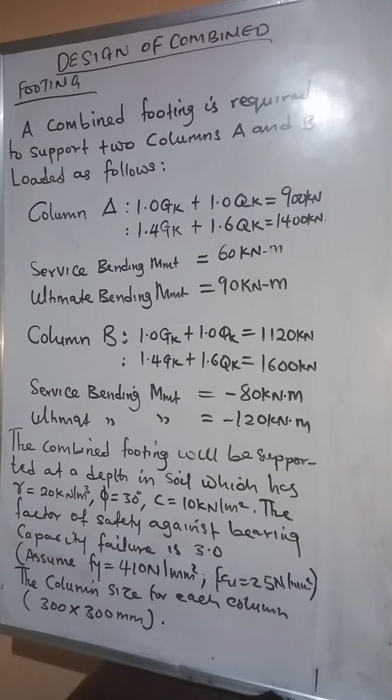All right, today we have a topic before us: design of combined footing. And we have a footing we intend to design that is going to be supporting two columns, A and B.

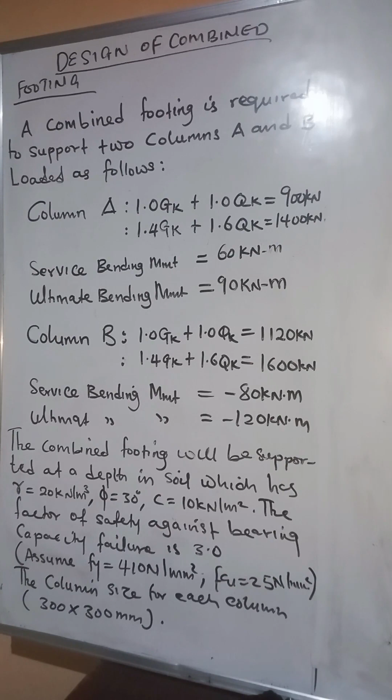We have been given the loads on the columns. The service load on column A is 900 kilonewton, the ultimate load at column A is 1,400 kilonewton. Equally, their service bending moment for A is 60, ultimate moment for A is 90. The load on column B: service load 1,120 kilonewton, ultimate load 1,600, service moment 80 kilonewton meter, ultimate moment 120 kilonewton meter.

The design parameters: characteristic cube strength of steel has been given as 410 Newton per millimeter square, and that of concrete, 25 Newton per millimeter square. Now the columns are of size 300 by 300, so they are made up of square columns.

So we're going to commence the design by first of all sizing of the footing, and we'll look at certain scenarios before going into the design. Now let's go over to the design.

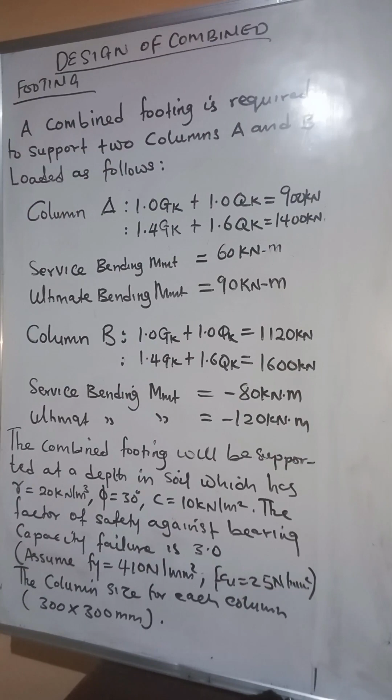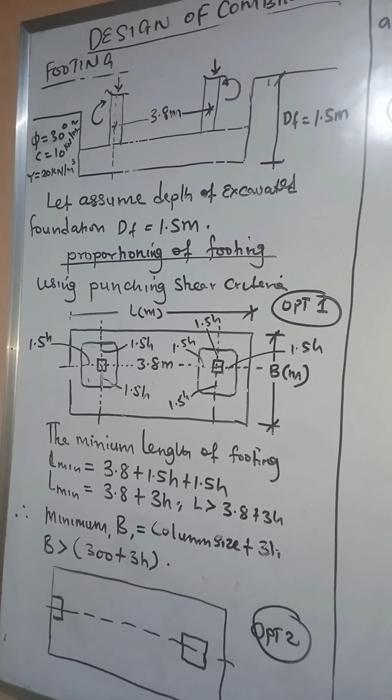All right, so we are going to look at the footing. We've already chosen a depth for the foundation, and we have the depth of the foundation to be 1.5 meter deep. Now let's assume that, and in proportioning the footing, we must...

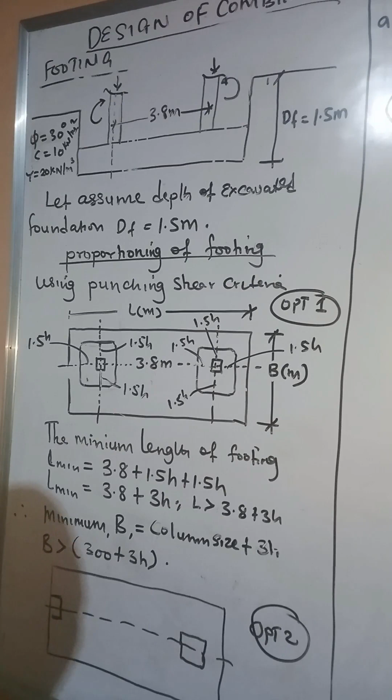Hey, you are making noise. No noise.

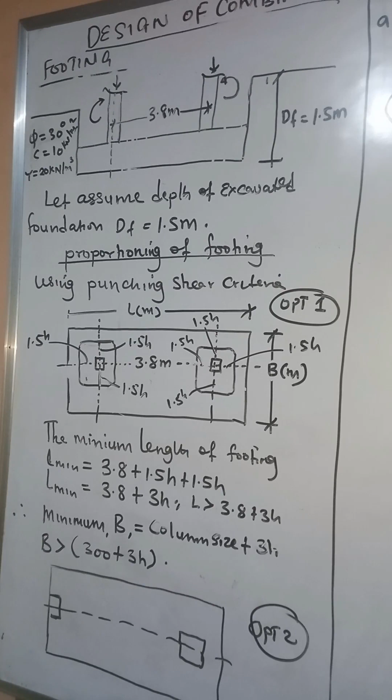All right, so in proportioning the footing, we are going to make use of the punching shear criteria. Now note, from the punching shear criteria, we are having from the face of the column, according to the British standard, 1.5H on each side of the face of the column to the critical perimeter.

So this is a critical perimeter, this area is a critical perimeter. So we have the distance from the face of the column to the critical perimeter as 1.5H on both sides, and we have a similar thing on the other side.

So if we want to design this footing so that we have a little cantilever from the face of the column, let's say 600 this way, 600 this way, 600 this way, so that we have that cantilever from the face of the column, we're going to have it as this.

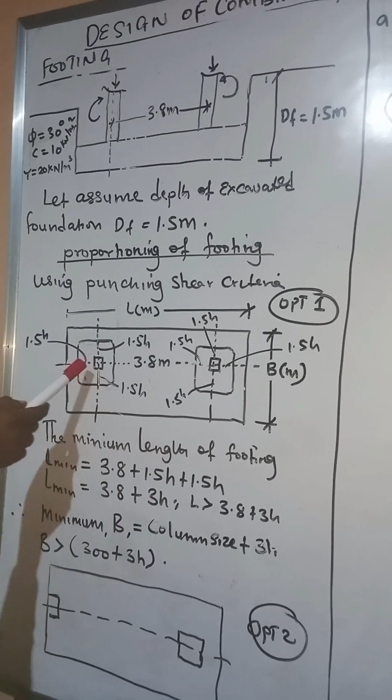Remember that for tension, our tension reinforcement must move beyond this critical perimeter. So if our tension reinforcement must move beyond the critical perimeter, it means that the minimum length of our footing is going to be this area plus the critical perimeter, the distance from the critical perimeter.

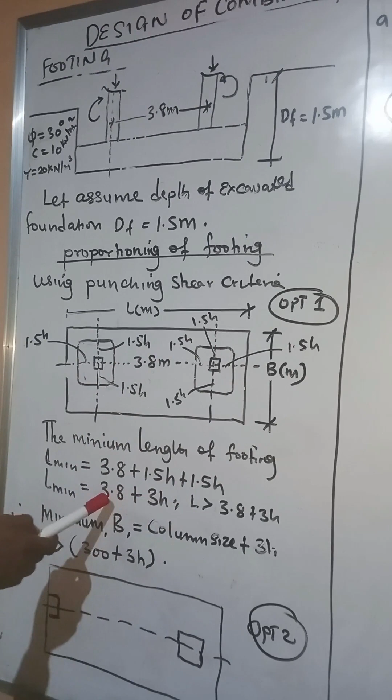That is this point and this point on this side. So we have 1.5H this way, 1.5H this way. If we add it up to 3.8, we'll have the total minimum length to be 3.8 plus 3H. So with this, we can choose a length for this footing. Having known our H, for any value of H chosen, we can conveniently pick a satisfactory length for the footing.

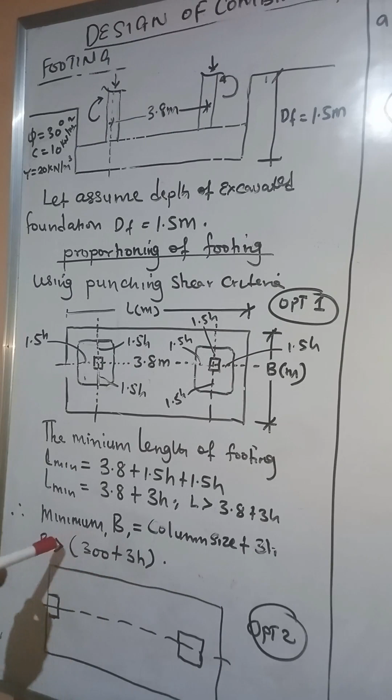A similar way also, we can do the same for the width. On the width side of the footing, we have from here to here 1.5H, so that is the minimum, here to here 1.5H. If we add it up, we have 3H plus the column length or width. You add it up, we're going to have 300, which is the column size, plus 3H. So that gives us the minimum breadth that the footing can take.

And if that is the case, we can choose a breadth that is greater than this. Similarly, also we can do the same for that of the length.

Now, there are other options that can be taken when it comes to the design of footing. We can decide to have our footing so that one side of the column aligns with the edge of the footing. This is very essential in the case of a property line, where we can have the foundation of the property interlap or intersect with the foundation of our footing.

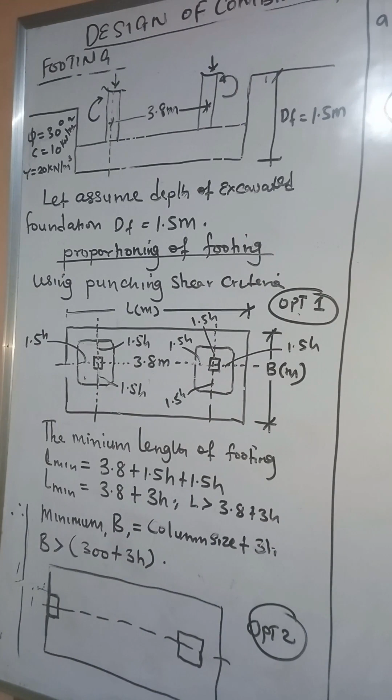If we are to design as an isolated pad footing, then we must avoid that interlapping or lapping. We must ensure that we push our footing so that the footing foundation does not spread beyond any kind of property line. So we can have that option, call it option 2, and this could be option 1. Now the third option we are going to look at is the trapezoidal shape footing.

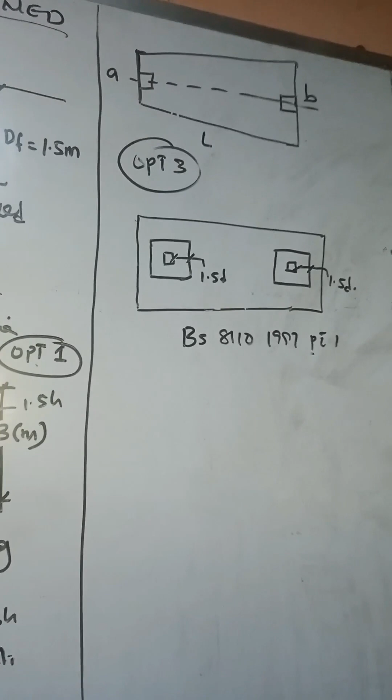Now the trapezoidal shape footing is very important when it comes to the issue of property line. It's very efficient. We are going to speak more on that when we are treating the design of trapezoidal footing. So that is another option, option 3.

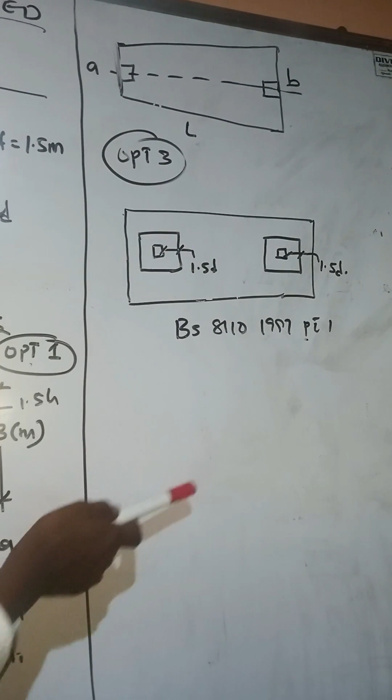Now we come to BS 8110/1997. Remember that this code states that the shear force, the punching shear, should be measured at a distance of 1.5D from the face of the column, and that is a recent version of the British code. Also remember, what we are using is the earlier version, which says 1.5H. Now we looked at Eurocode 2, which has its own version for this. For Eurocode 2, it says that from the face of the column to the critical perimeter should be taken as 2D. So whichever code you are using, the same principle can be applied.

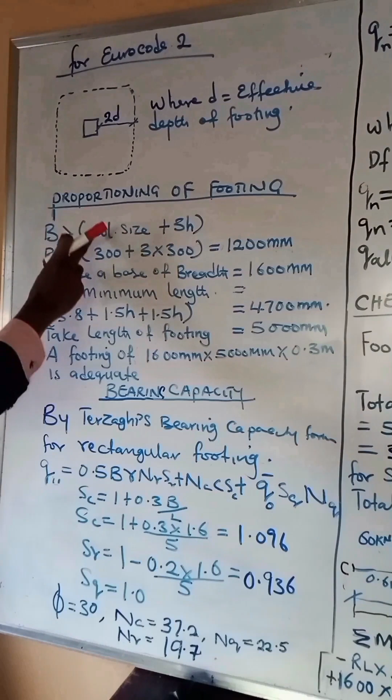All right, so let's go over and do the sizing of this particular footing. What we want to do is proportion this footing. Now, in proportioning the footing, like we did from our BS 8110, we know that the breadth of the footing should be greater than the column size plus 3H. So if we do that, we're going to have the breadth of the footing to be 1,200 mm.

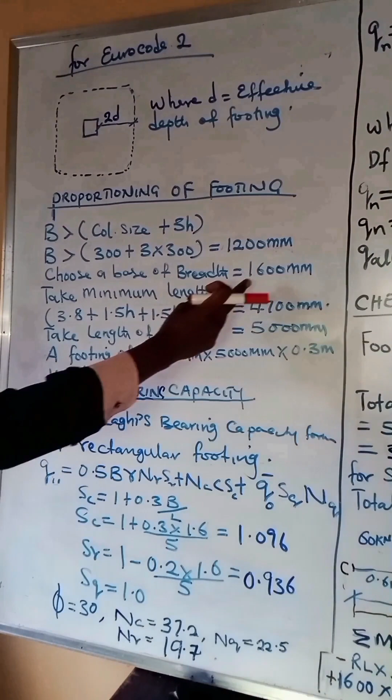Now, we say let's choose a breadth of footing to be 1,600 mm. Now, if we do that, we have our breadth of footing here. Now, next we are going to take the length of the footing. Take the minimum length of footing, like I've illustrated, to be equal to 3.8 plus 1.5H on one side and 1.5H on the other side. So we have it eventually to be 4,700 mm.

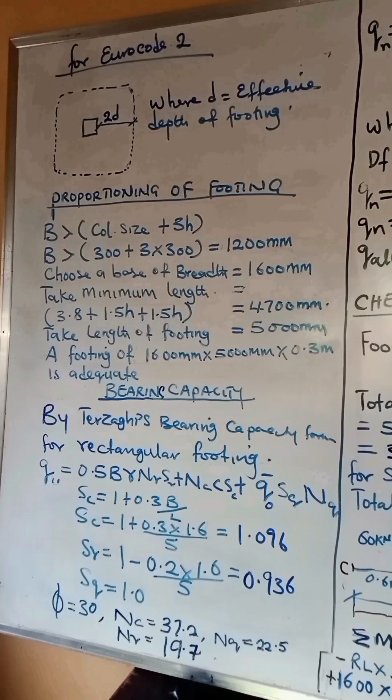Now, the next stage is the determination of the bearing capacity of the soil. We've been given all the geotechnical parameters for the determination of the bearing capacity. The internal angle of friction we'll have to be 30. We'll have the unit weight of soil. The depth of the soil has not been given, but we are going to assume the depth of soil to be 1.5 meters from the ground level.

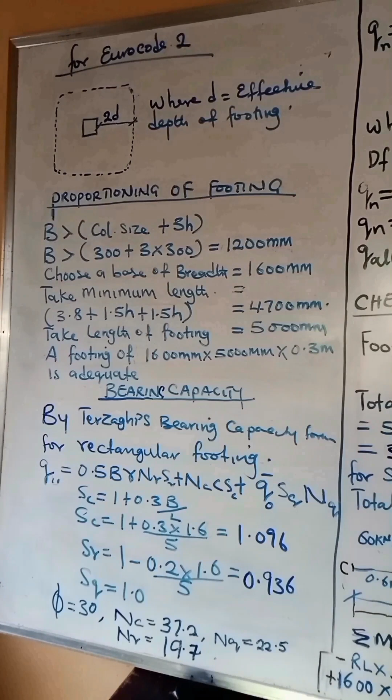Now, having made that assumption, we are using Terzaghi's bearing capacity formula, the general formula, which we have on the board here. Of course, we know that we have the shape factors, Terzaghi's shape factors, SC, S gamma, and SQ, and B over L, which represents the aspect ratio, the breadth over the length. We've already chosen the breadth to be 1.6 meters, and the length to be 5 meters.

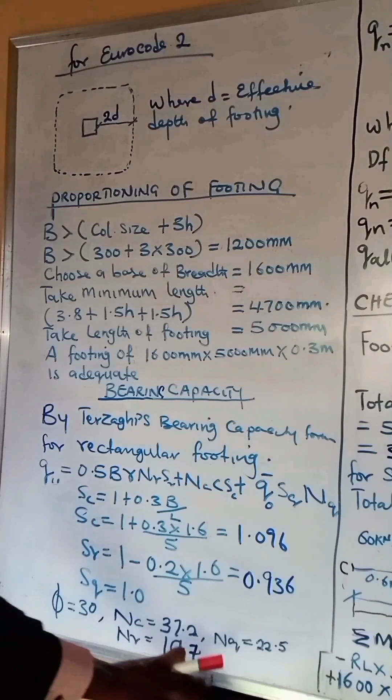So we are going to substitute them into our shape factors. If we do that, we'll have SC to be 1.096, S gamma to be 0.936, and SQ to be 1.0. Now, the internal angle of friction from our table, from Terzaghi's table, you can check that out. For an internal angle of friction of 30 degrees, we have Terzaghi's coefficient NC to be 37.2, NQ to be 22.5, and N gamma to be 19.7. So these are the parameters we've gotten from the table.

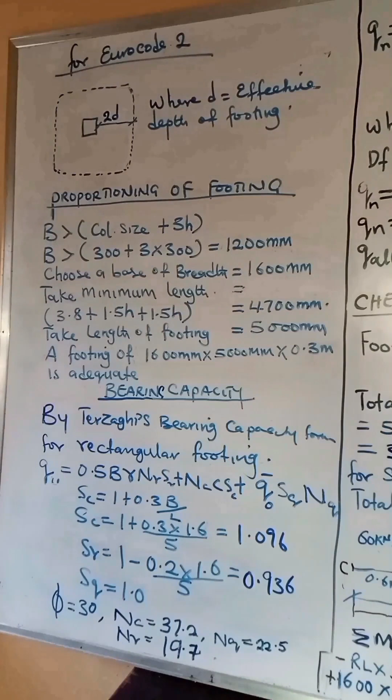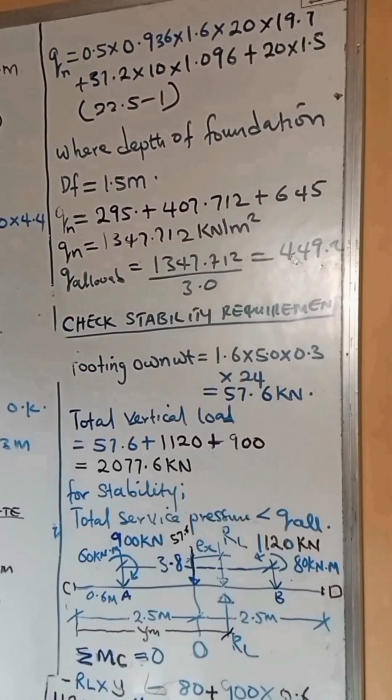Okay, so now let's go over to determine the bearing capacity of this foundation. We discovered that the net bearing capacity is 1,347.712 kilonewton per meter square. Now we have the allowable soil bearing capacity by dividing it by a factor of safety given in the question, 3.0. If we do that, we are going to have the allowable bearing capacity to be 449.2 kilonewton per meter square.

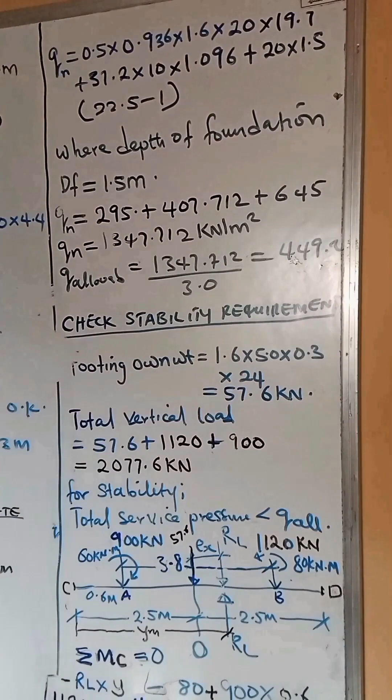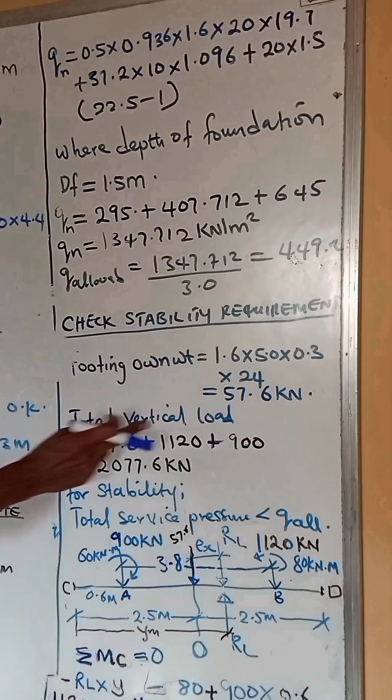Now, the next stage is stability check. We are going to check for stability of the footing. We say the footing self-weight we have to be 57.6 kilonewton. We have the total vertical load, total service vertical load to be 2077.6 kilonewton. Now, for stability requirement, the total service load or service pressure should be less than the allowable soil pressure, which is the allowable soil bearing capacity of the soil.

Okay, so based on that, we are going to determine the service pressure. We have the loads as arranged on the footing. The total length of the footing remains 5 meters. We have a clockwise moment of 60 kilonewton meters, and an anti-clockwise moment of 80 kilonewton meters. We have a service point load of 900 kilonewton. At point B, we have 1,120 kilonewton. At point A, we have 900 kilonewton. The total self-weight of the footing is 57.6.

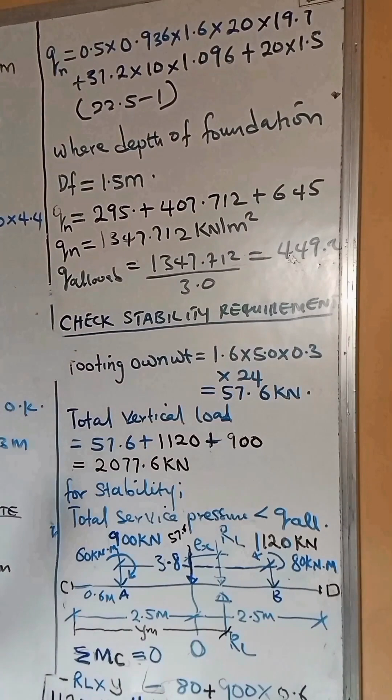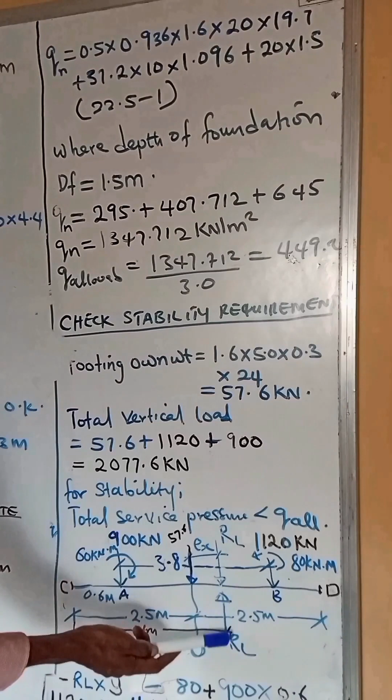Now, let the total resultant load be acting on our right-hand side at an eccentricity EX, which we do not know. So since we do not know EX, we are going to say that let that resultant load be acting at a distance y from point C. Remember, the total resultant load is going to be in the reverse direction because in order to keep this system in equilibrium, the resultant load should be in the opposite direction. That's why we're having it on this side.

So we already have an eccentricity, and we are saying that let that resultant load be acting at an unknown distance y from point C. So having done that, the next thing we are going to do is take moment about point C. If we take the algebraic sum of moment about point C to be 0, we have all anti-clockwise moment as negative, and clockwise moment as positive. If we solve that amicably, we obtain our y. Once we have our y, we can therefore obtain our ex.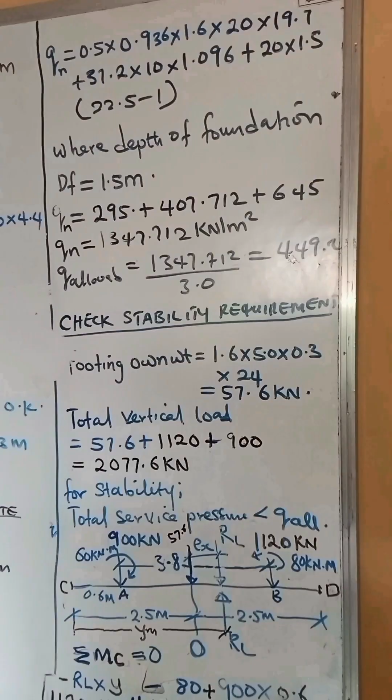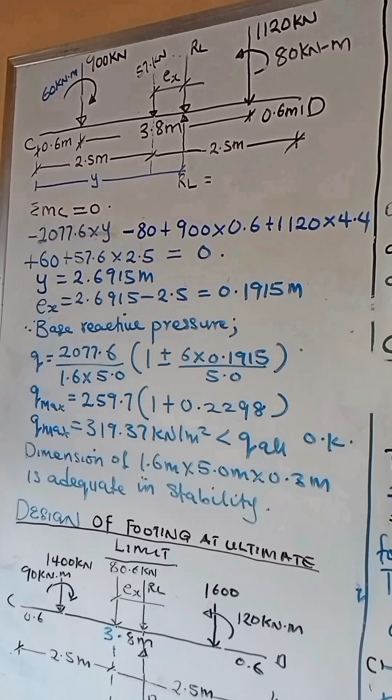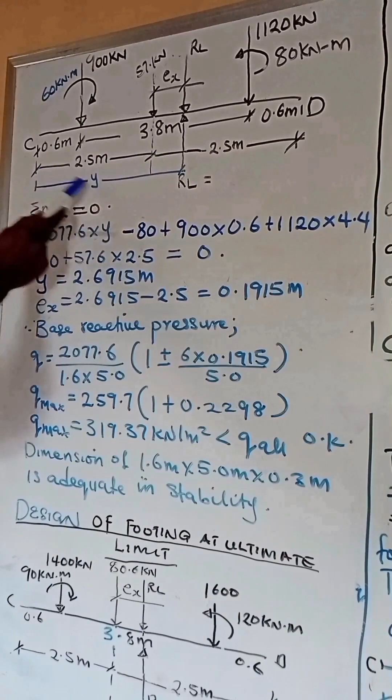Look at the determination of our y. So like we have it here, summation of moment about point C equals 0. If we do that, we're going to have our y to be 2.6915 meters. So if from this point to this point is 2.6915, it means from here to here, all we need to do is subtract this, say y minus 2.5, to give us EX. So we are saying that EX is 0.1915 meters, okay?

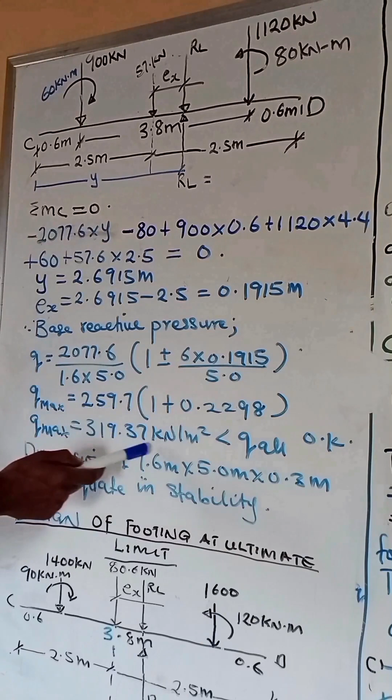Now the base reactive pressure, like we normally do it, we'll have this base reactive pressure. The maximum base reactive pressure, we're having it to be 319.37 kilonewton per meter square. We are not going to consider the minimum pressure because at this point, we just want to be sure that our dimension of 1.6 meter by 5 meter by 0.3 meter is adequate for stability. So once we discover that this is less, like we have discovered, our Q allowable is 449 kilonewton per meter, and we have this to be 319. So we can therefore boldly say that our choosing dimension of 1.6 meter by 5 meter by 0.3 meter is adequate.

Adequate for stability. The next stage we are going to go into is the design of the footing for ultimate load. Now, for the design of the footing, we are going to do the same thing to obtain the ultimate pressure, which is the same as the base reactive pressure.

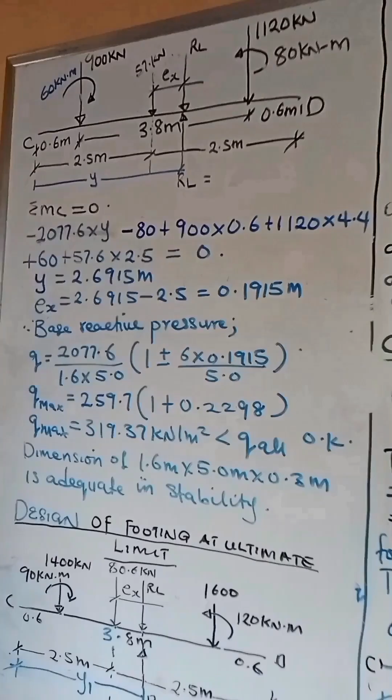So, like we have it as usual, we have our eccentricity. Assume our load acting at this point. So we are going to obtain the distance, which is from here. Let's call that y1, from the point of our resultant load to our point C again. So we'll take the same procedures like we did before and obtain the ultimate pressure that is acting on the footing. Of course, this is the pressure we're going to use to design the footing. Okay, so let's do that as we work on this one.

All right, so summation of moment about point C, we are going to have it equal to 0. Now we have the anti-clockwise moment about point C. Remember from the diagram, it's going to be a negative moment because it's an anti-clockwise moment. So the point Y remains. To do that, we have 3080.6 Y plus a clockwise moment of 90, plus another clockwise moment of 1400 times 0.6. Working that out, we have an anti-clockwise moment of 120. Working that out, we're going to have 2.6136 meters. So we say that the eccentricity from the centroid becomes 2.613 minus 2.5, which is equal to 0.1136 meters. Okay, so this is what we have as our eccentricity.

Now the next step is to calculate the base reactive pressure. The base reactive pressure, substituting our values, is the total load divided by the area, accounting for our eccentricity. So if we do that, we're going to have the maximum base reactive pressure to be 437.568 kilonewton per meter square.

And we'll have the minimum pressure to be 332.581 kilonewton per meter square. So this is what we have as the base reactive pressure from the soil.

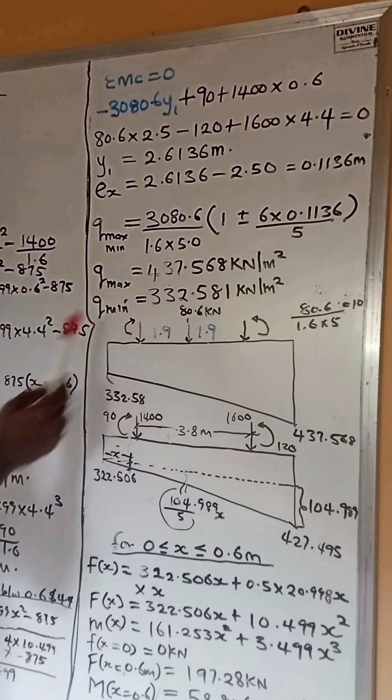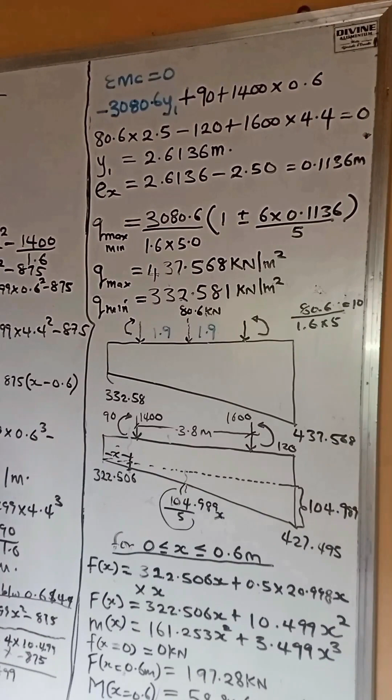Remember, it's per meter because we've already divided our load into linear meter. Okay, so the next load zone — we're going to take the next load zone so that we'll get the next expression and also the moment and shear force values. All right, so the next load zone we have it to be at this point.

So we have the next load zone to be at this point. Now, if you look at the zone, we are going to have the moment at this point. Taking the shear force expression in terms of x, it remains what it is, like we did in the zone between 0 to 0.6 — it remains the same.

But the only difference we're going to have here is, remember, if you cut across between this zone and this zone, you're going to have 1,400 kilonewton as another force that is acting. That is a line load, remember — so it's a line load. We are dividing it by the width of the footing.

Okay, so we have this as the figure. Now the next phase is to substitute values for the shear force along the zone between 0.6 to 4.4. So if we do that, we'll have the shear force when x is 0.6, I will substitute it here.

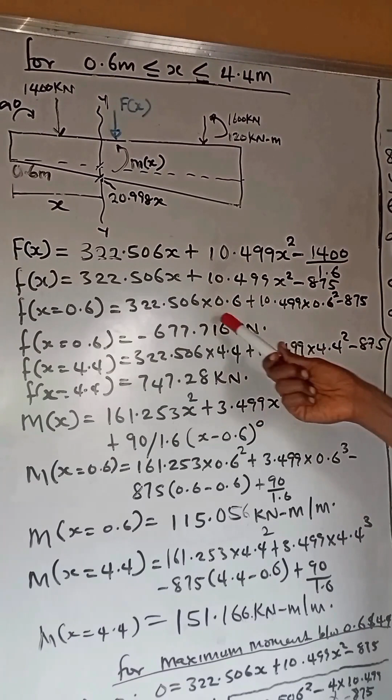We're going to have the shear force value to be negative 677.716 kilonewton. Now the next is when x is 4.4. If we substitute that value, we're going to have 747.28 kilonewton as the shear force.

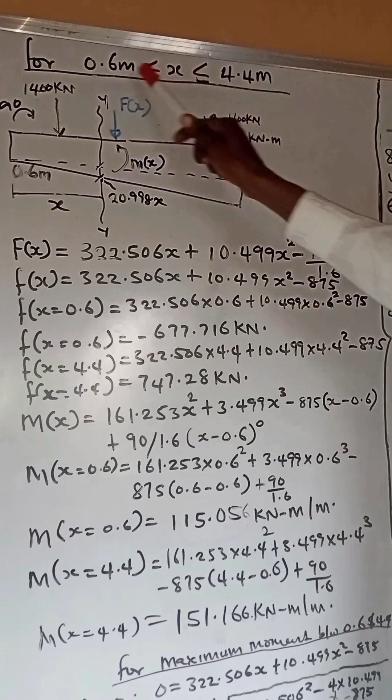So we've got the shear force for the two extreme ends of this load zone. Now the next we're going to do is get the moment for the two extreme ends. And having gotten the moment, we are still going to obtain the maximum moment between this zone.

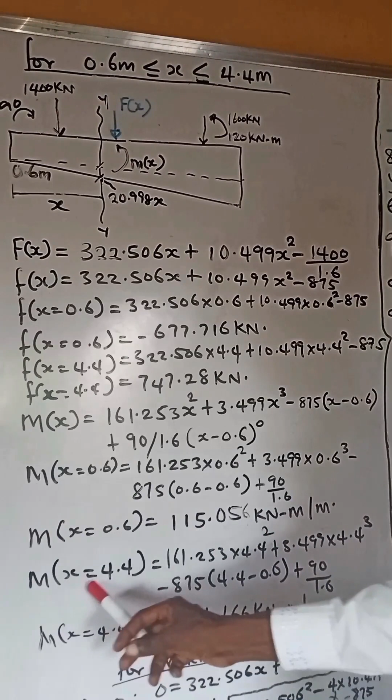Okay, so we say the maximum moment, the moment at 0.6. If we do that, we're going to have that moment to be 115.056 kilonewton meter per meter. When x is 4.4, we'll have that moment to be 151.166 kilonewton meter per meter.

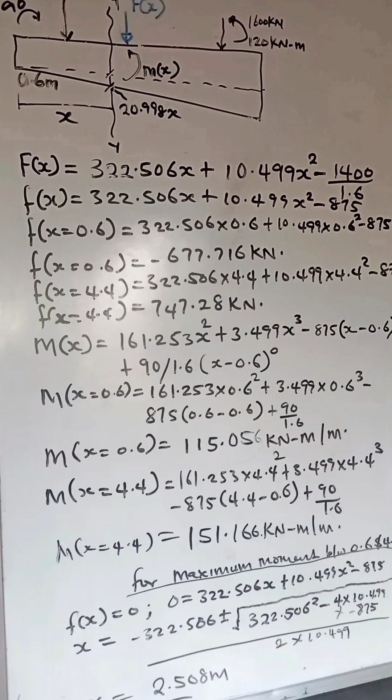So we've done that. So the next is to determine the maximum moment along this particular span. Of course, we know that maximum moment occurs where shear force is 0, so we equate our shear force expression to be 0.

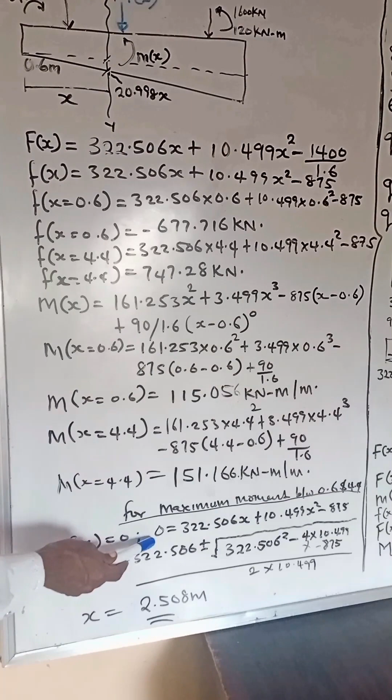All right, so determining the maximum moment at the point where shear force is 0. If we do that, we are going to equate our shear force expression. These are the shear force expressions. So if we equate this shear force expression, we are going to have the point of maximum moment.

is at a point that is 2.508 meters from the end of C, point C, which is at this point. Okay, so that is where we have the maximum moment.

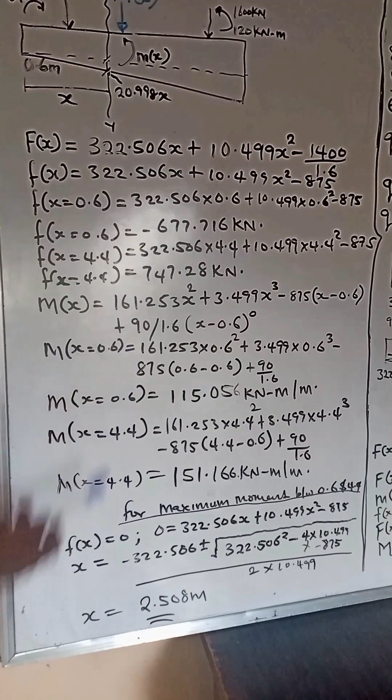So we're going to substitute this value of 2.508. All right, so at the point of maximum moment, if we solve that, we're going to have the maximum moment to be negative 543.759 kilonewton meter per meter. Now, this gives us the maximum moment between that span, 0.6 to 4.4.

The next, we are going to go to the next load zone. So the maximum moment, we are going to have the maximum moment to be negative 543.759 kilonewton meter per meter.

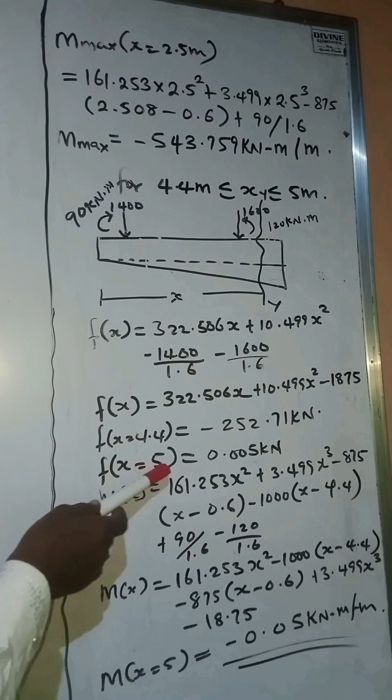Now, this is the expression for the shear force. So we have, when x is 4.4, we have the shear force to be negative 252.71 kilonewton. When x is 5, we have the shear force to be 0. And the moment expression becomes this.

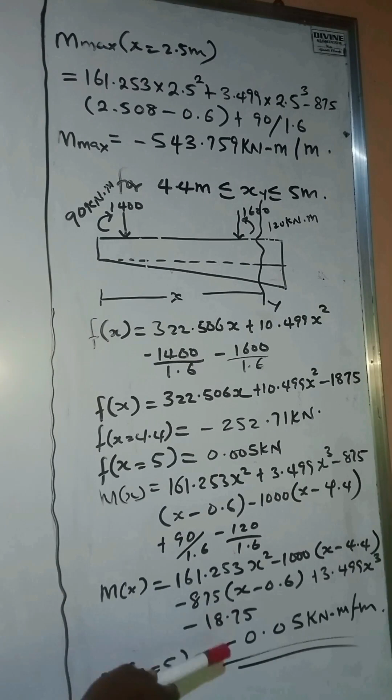Let's get the moment expression. This is the moment expression. Now, substitute the value when x is equal to 5, you will see that the moment at that point is 0, which conforms to the actual situation. Now, we need to obtain the value.

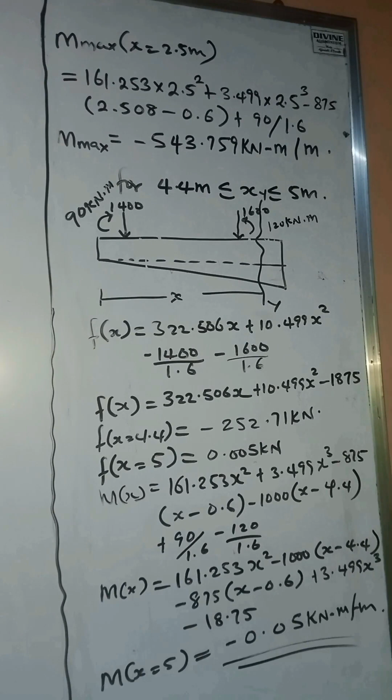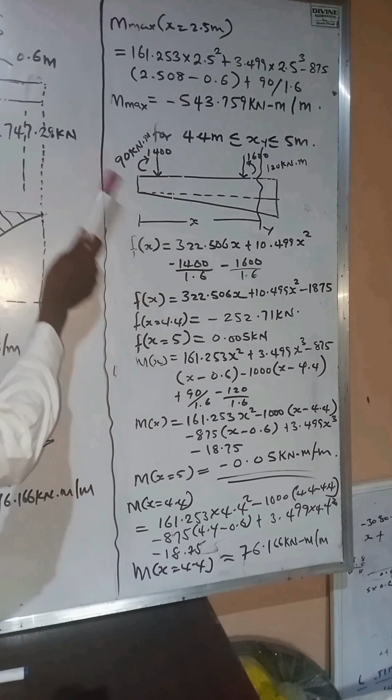It seems we've not gotten the value for moment at 4.4, so let's substitute that for that point, moment for n. Now, at the last part, we're going to solve when x equals 4.4, which is at this support edge. If we work that out, we're going to have the value for moment to be 76.166.

All right, so this brings us to the conclusion and the end of the determination of the bending moment and the shear force. So quickly, let's draw the diagrams, the bending moment diagram and the shear force diagram, and we'll proceed further into the design proper.

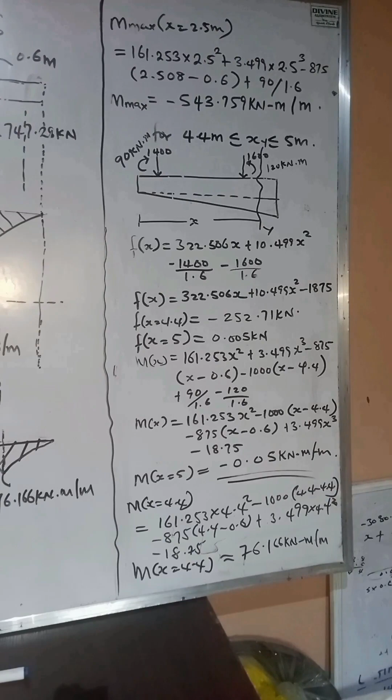All right, so looking at the board, you're going to see the bending moment and the shear force diagram being drawn on the board. So having done this, the next phase is to carry out the design.